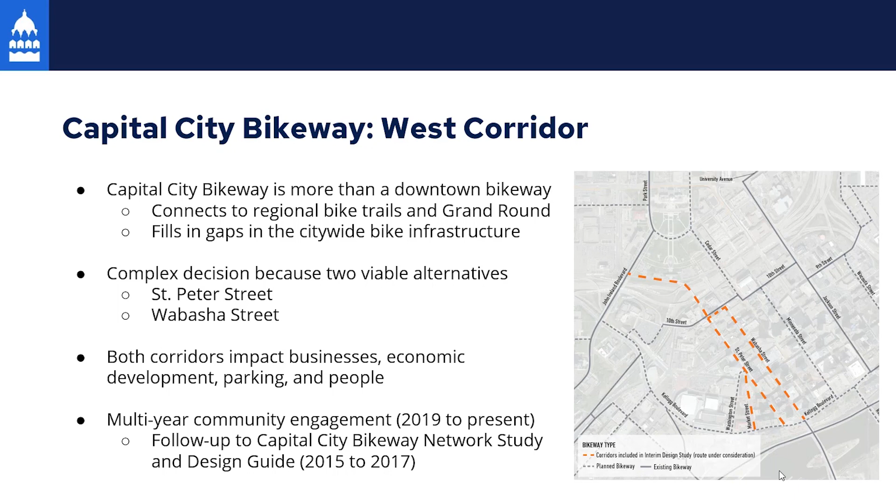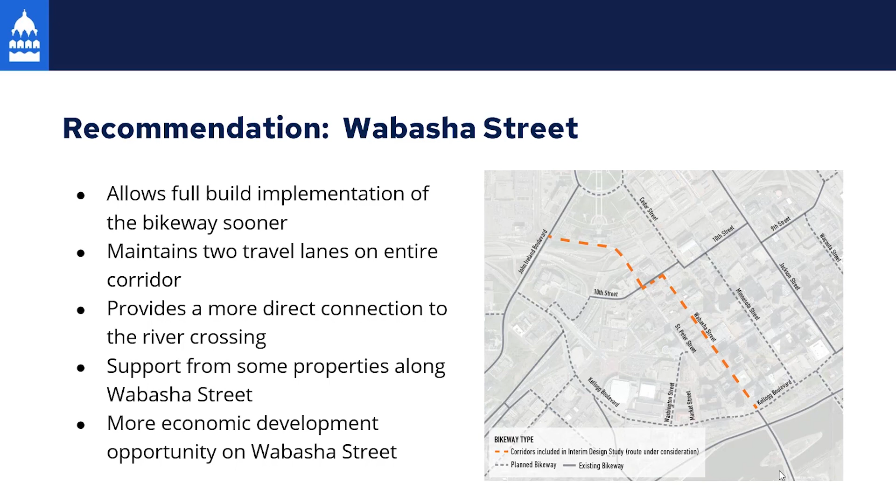This recommendation today is the outcome of a multi-year community engagement process. Before that, there was the Capital City Bikeway Network Study that was done from 2015 to 2017. The recommendation we're making is for Wabasha Street to be the western leg of the Capital City Bikeway. This allows for full build implementation of the bikeway more quickly. It maintains 2 travel lanes on the entire corridor. It provides a more direct connection to the river crossing, and there is support from some properties along Wabasha Street. We also think that there's more economic development opportunities on Wabasha Street.

To walk through the details of this, including the history and the work we did, and more information on the recommendation and the options we looked at, I want to introduce you to Randy Newton, the city's traffic engineer. Thank you, Sean. As Sean shared, I'm Randy Newton. I'm the city's traffic engineer, and I have been charged with leading the city's efforts on the Capital City Bikeway Interim Design Study. With this presentation, we wanted to go through the background and history of the Capital City Bikeway and the process we undertook that led to the recommendation for Wabasha Street.

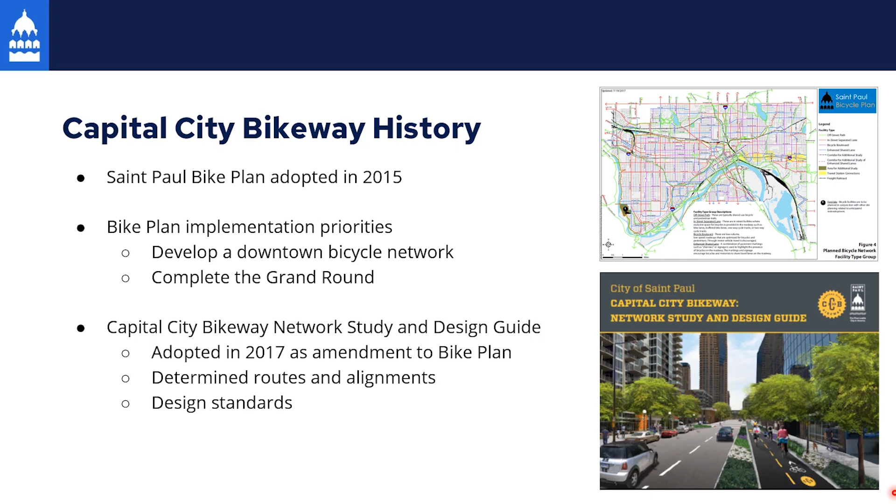A little history on the Capital City Bikeway. The St. Paul Bike Plan was adopted in 2015. 2 of the main priorities of the bike plan were to develop a downtown bike network and to complete the Grand Round. The first step in developing that bikeway network was the completion of the Bikeway Network and Design Guide. That work was adopted in 2017, and the key outcome of that was determining preferred routes and alignment for the Capital City Bikeway and design standards for the full build of the bikeway.

Since the completion of the Bikeway plan, the city has been working on the implementation of the Bikeway network. We started with the Jackson Street corridor on the east side of downtown, which was constructed in multiple phases between 2016 and 2018. The majority of this work was done as part of full street reconstruction. Last fall, we were able to implement the 10th Street corridor, and a remaining portion of that is yet to be constructed this year.

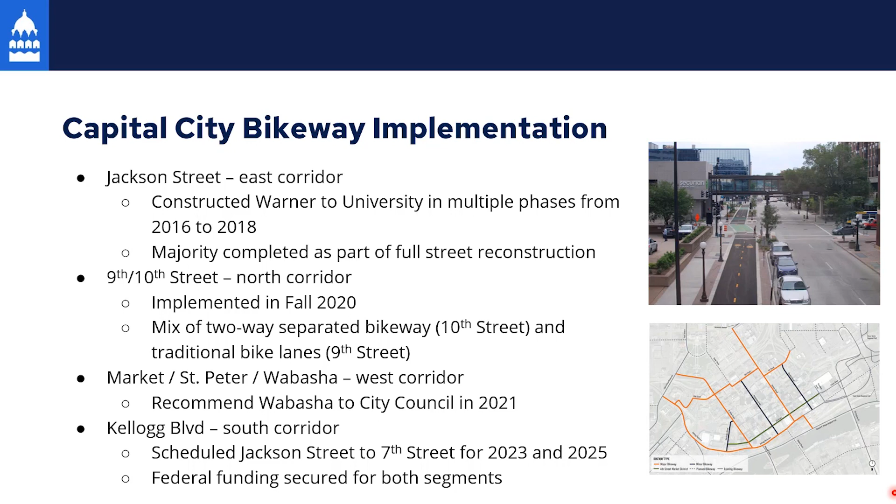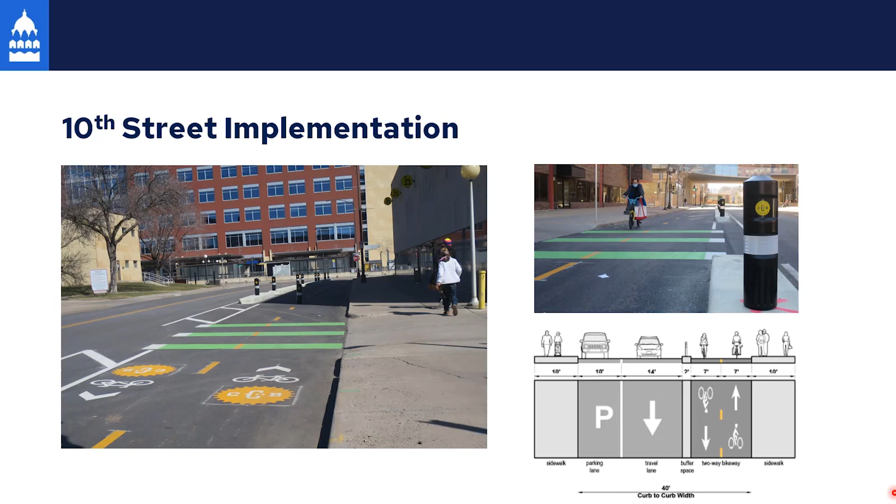A couple key things with the Capital City Bikeway and how it furthers some of the main city goals and policies. Within the Bikeway plan, it identified that a bike network downtown was a priority, and in particular, a network that calls for a safe and well-connected bikeway serving all ages and abilities. This is consistent with a couple of key city goals. First, it's providing safe and reliable transportation choice and removing the need for single occupant vehicle trips. Secondly, it's a step towards our goal to significantly reduce the number of vehicle miles traveled in the city.

2 years ago, we began work on the interim design study process. With this work, there were 3 primary objectives. The first was to determine an interim design for the north corridor, which was 9th and 10th Street. That work has since been completed. The other 2 steps were to determine a preferred route for the west leg of the corridor, either St. Peter or Wabasha Street, and to determine appropriate design for that corridor.

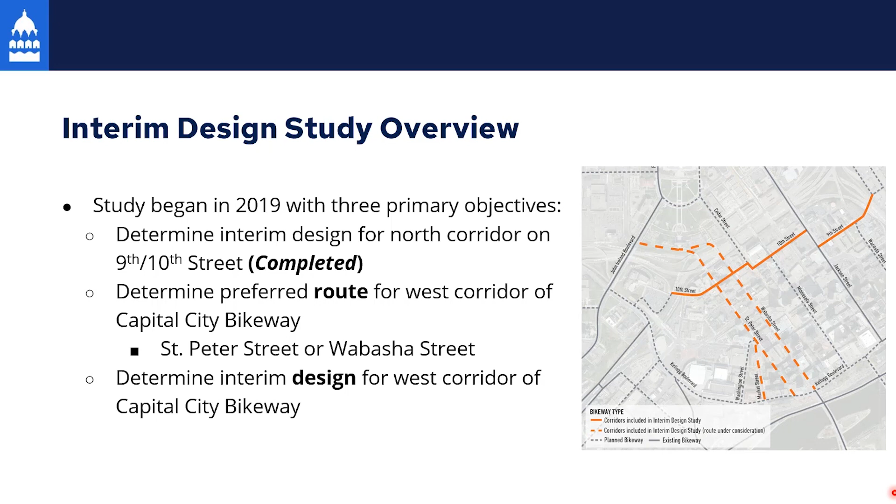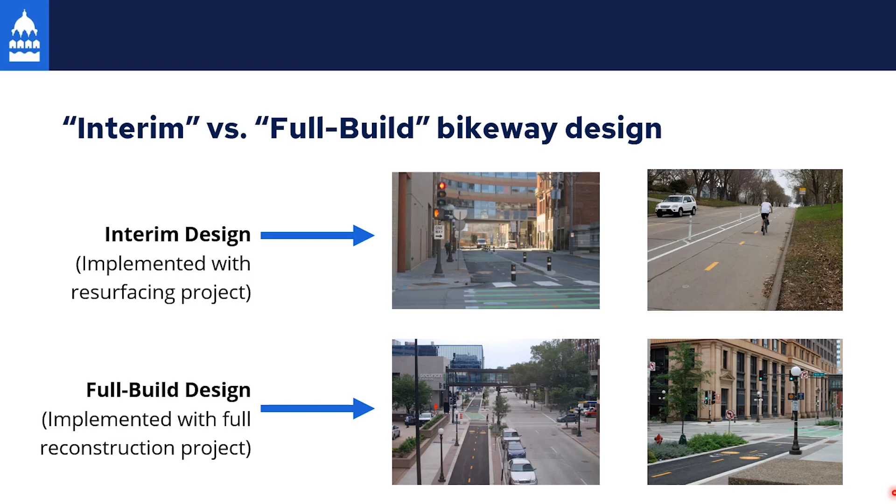We will often be using the difference between interim and full build as we go through this. What we mean by interim is something that can be built within the confines of the existing roadway. The picture in the upper left is a picture from what we implemented on 10th Street last year. On the upper right, it's a picture of Pelham, which was another interim implementation several years ago. The full build design, which are the pictures on the bottom, are Jackson Street and show essentially a bikeway constructed as part of a full street reconstruction.

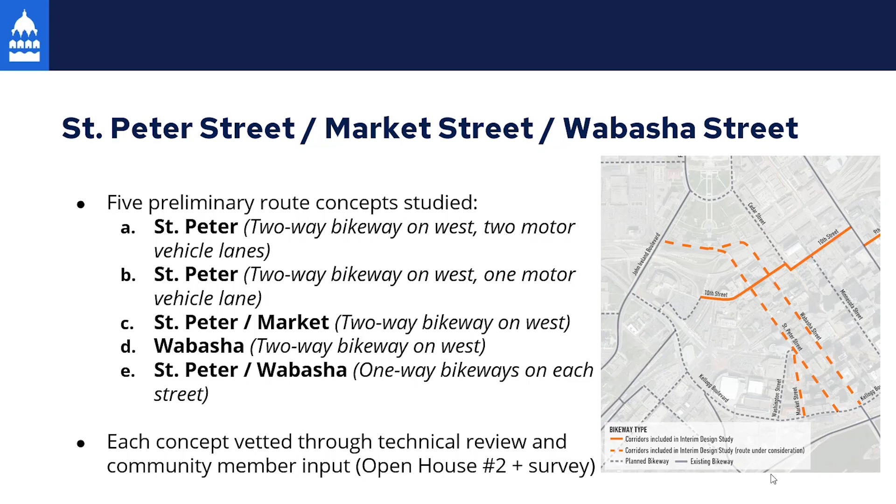Our process for the review of the west leg of the Capital City Bikeway was an iterative one. We started with brainstorming a number of different route concepts, and ultimately pared that down to 5 initial routes that had a preliminary evaluation and ultimately were shared with the public at open house number 2. Through the feedback that we received at open house number 2 and our internal review, we ultimately pared that down to 3 primary corridor concepts that we reviewed in greater study.

One was the St. Peter Market Street corridor, which was a 2-way bikeway along the west side of both streets. The second option was the bikeway along the full length of St. Peter, which maintained primarily 2 motor vehicle lanes along St. Peter, except for a stretch between 4th and 6th Street.

And the third alternative was a revised Wabasha Street alternative that followed Wabasha Street from Kellogg to 10th Street and used the 10th Street bikeway to jog over to St. Peter to complete the crossing across the 94 corridor.

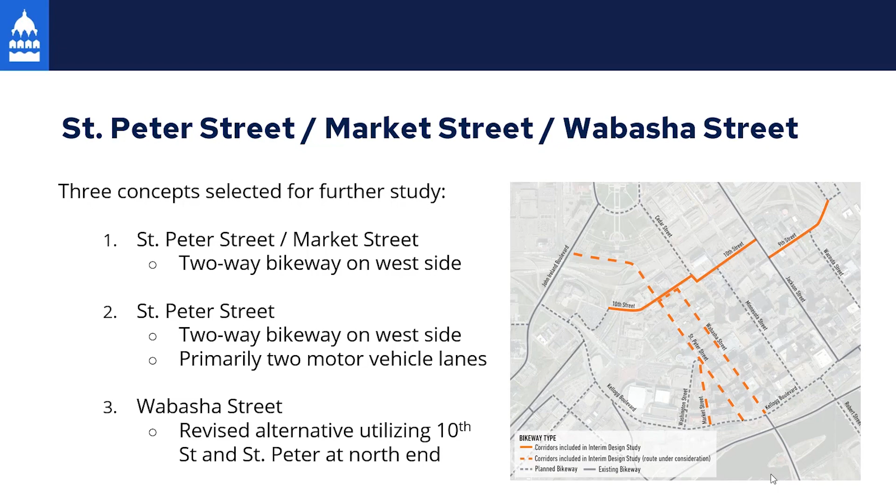Over the last 2 years going through this process, we've undertaken an extensive public engagement effort. This includes maintaining a project webpage, which includes a lot of information that we have shared throughout the project. We have had 3 public open houses with good attendance, and that included follow-up surveys that people could take online to provide additional feedback on the process.

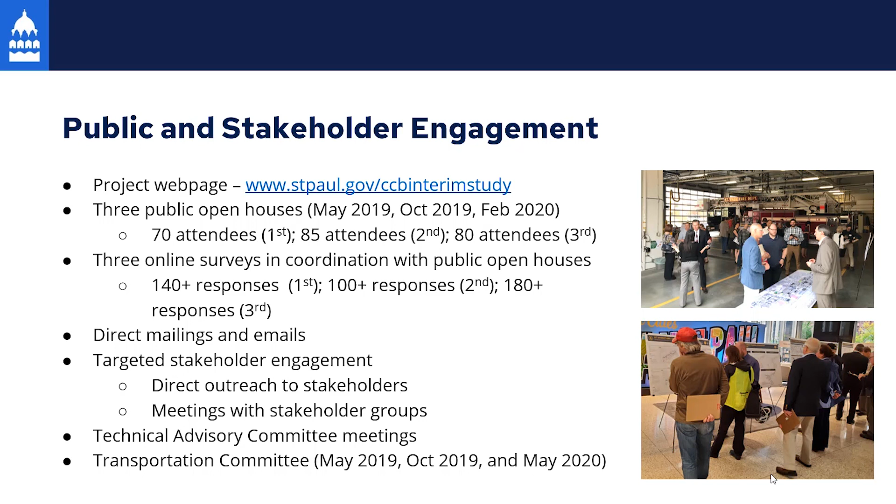We directly reached out and had conversations with a number of different stakeholders throughout the process. We also had an internal group that met several times to work through the technical details of the project, and we have made 3 presentations to the Transportation Committee. Through this process, we've heard a number of things. The following is a brief summary of some of the key highlights.

First, we've heard that there is a preference for bikeways with physical separation from motor vehicle traffic. We've also heard a preference for 2-way bike facilities as opposed to 2 one-way facilities. In terms of use of the right-of-way space, sidewalks and sidewalk amenities were seen as a top priority. The need for loading zones and valet zones was an important concern for business operations. Loss of convenient parking is a concern that we hear on most projects we do, and was certainly another one that we heard on this corridor.

We heard a concern over the traffic impacts of reducing St. Peter to a single lane, in particular the potential to block that single lane due to vehicles and delivery vehicles loading and unloading, as well as valet users. This was a particular concern during the event times that we experience downtown. We also heard that there was support from some of the properties along Wabasha Street for the bikeway. We also heard and acknowledged that bikeway maintenance is very important, especially in the winter months.

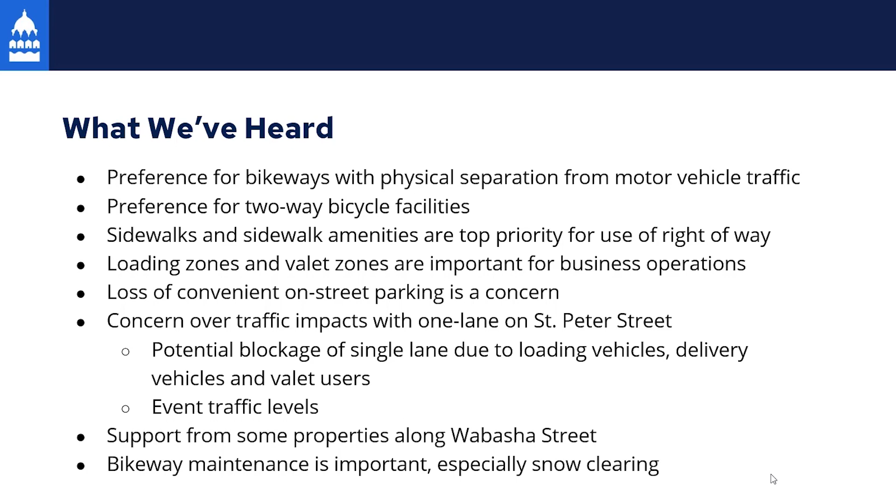As part of our evaluation, we looked at a number of different factors. One of the things that we did was complete an evaluation matrix, which is available online, that shows some of the key differences between the corridors. What is shown here is a brief summary of some of those highlights. One of the key things with the Market Street alternative is that over 40 plus days a year, we'd expect the bicycle network to be interrupted due to special events. Another key difference was that the traffic volumes on Wabasha are 2 to 3 times higher than what you'd experience on St. Peter and Market.

We did identify that Wabasha would have more vehicle and bike conflicts than either St. Peter or Market Street. In regards to bike conflicts, that is the number of interactions between bikes and vehicles that would exist on a corridor. Do note with this one in particular that we do not think the number of vehicle-bike conflicts on Wabasha is particularly high or unusual for a bike network, and certainly is not a reason that we would not select a corridor.

We identified that there is more parking loss on Wabasha than on either the St. Peter or Market Street alternatives, approximately 80 spaces versus 60 on St. Peter or Market. We note that with the St. Peter alternative, there is a direct connection to the north across I-94, and with the Wabasha option, there is a direct connection to the south across the river.

We also did look at the full build in terms of what this would look like if the roadway was fully reconstructed. We did note that with a full build and the potential to go down to a single lane, the St. Peter option offers more flexibility in the reconstruction of the roadway. However, we do note that that does assume that a single lane would be constructed, and that there were a lot of concerns with how that would impact the traffic operations downtown.

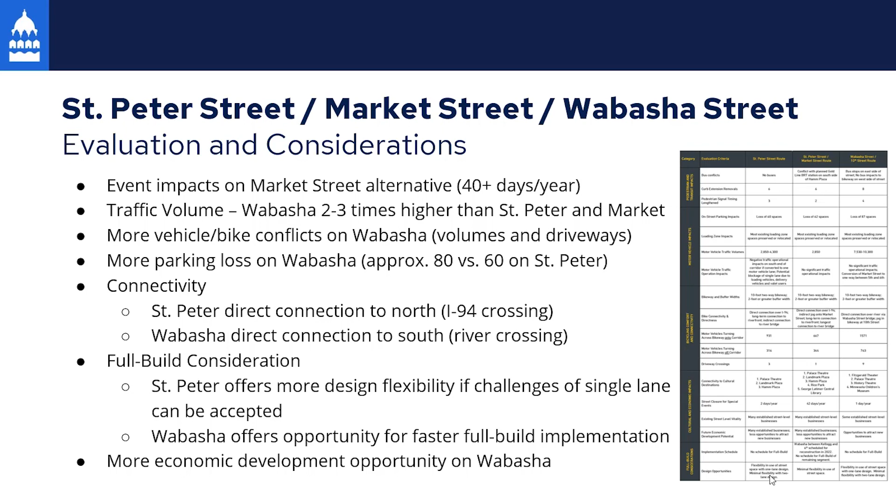Lastly, Wabasha offers more economic development opportunity with the implementation of the Bikeway. With these next slides, I'm going to walk through each of the alignments in a little bit more detail to provide more information on each alignment.

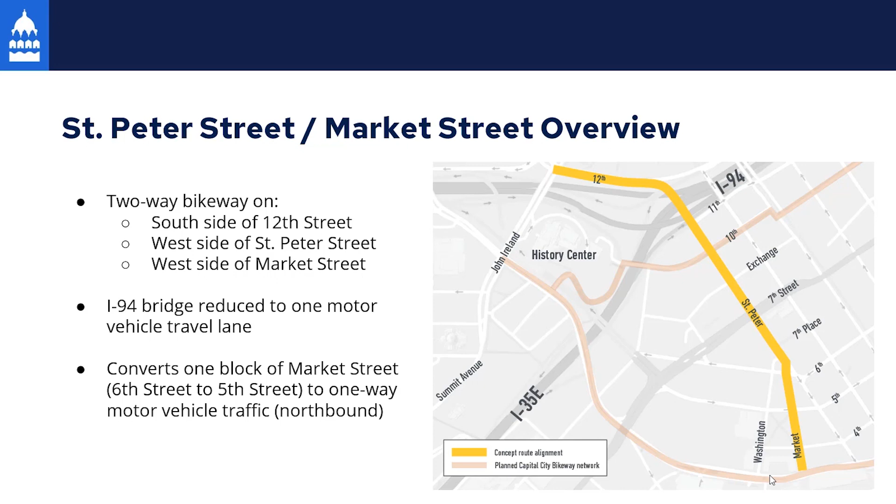First up is the St. Peter and Market option. This option is a two-way bikeway along the south side of 12th Street, along the west side of St. Peter and the west side of Market. Across the I-94 bridge at 12th Street and St. Peter would be reduced to a single lane. It also would result in the conversion of one block of Market Street to a one-way motor vehicle traffic.

A couple of the features of the St. Peter Market alternative include that it retains the curbside space along the east side of St. Peter. It does result in a challenging connection between St. Peter and Market. We also note that the use of the Market Street convertible space is not compatible with the events that commonly are staged there.

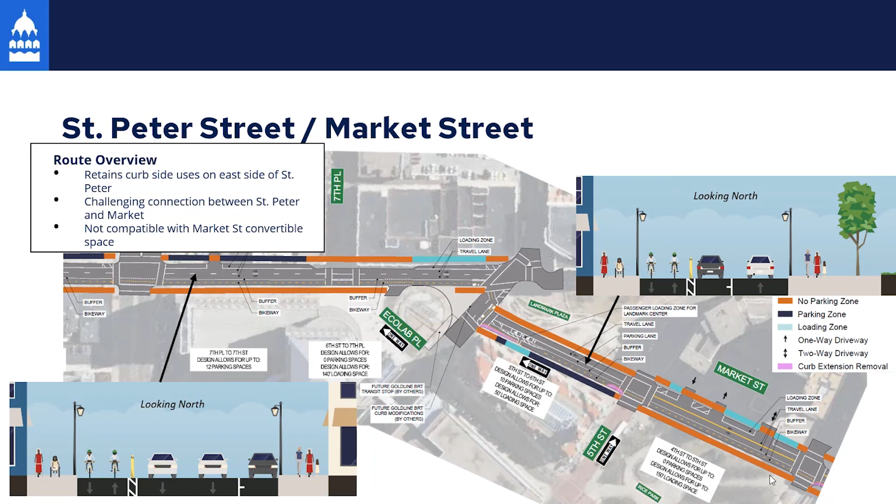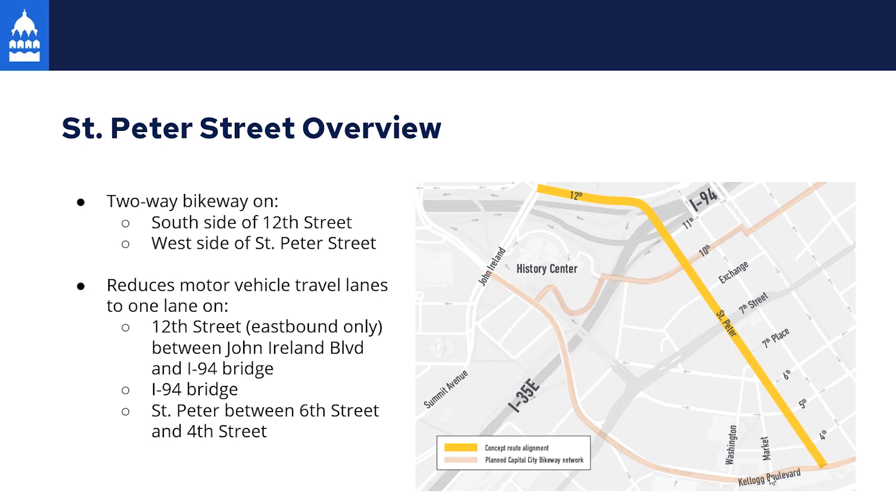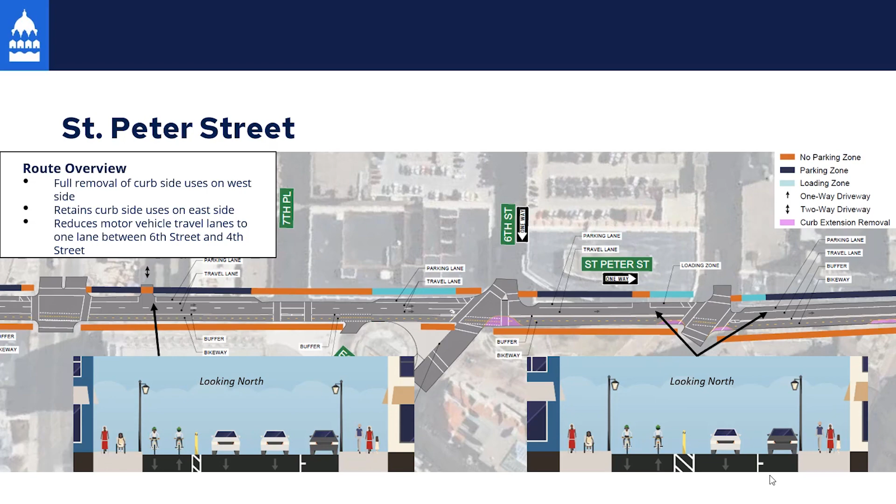Moving on to the St. Peter Street alternative, this concept includes a two-way bikeway along the south side of 12th Street and along the west side of St. Peter. This reduces various sections of the corridor to a single lane. This includes 12th Street on the north side of 94, the crossing of I-94, and St. Peter between 6th Street and 4th Street. This concept includes the full removal of curb uses along the west side of the roadway, but retains all the curbside uses on the east side. As noted before, it reduces motor vehicle traffic to a single lane between 6th Street and 4th Street.

This slide shows the pros and cons for St. Peter Street, which we ultimately deemed to be a viable alternative, but one we did not recommend. On the pro sides, this option maintains parking and loading zones along the entire east side of the corridor. It maintains two motor vehicle lanes along the majority of the corridor. There are less vehicle and bike conflicts than Wabasha, and it provides a direct connection to the north across I-94. In a full build option, there is more flexibility for the St. Peter option. However, this assumes that we would reduce the entire corridor to a single lane, which we also have concerns with.

On the con side, the reduction to a single lane creates concerns with valet traffic, deliveries, and event traffic blocking up that single lane and creating congestion in an important part of downtown. There are also impacts to the Palace Theater loading operations as we remove parking along the west side of the roadway. There are some design constraints that we'd expect to have to deal with with regards to state aid and emergency vehicle access. These are things we expect to be able to work through, but they may affect how we would do the design. There's also the loss of on-street parking and the removal of bump outs that would occur with this option.

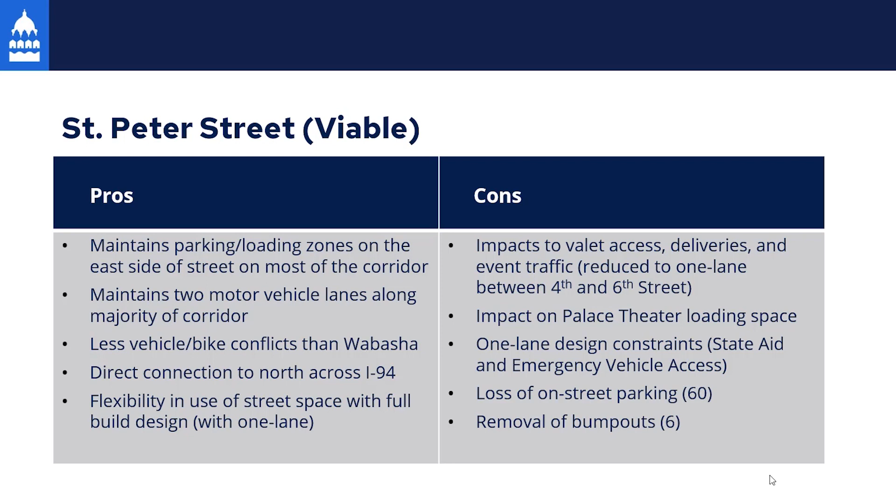Moving on to Wabasha Street. This option includes a two-way bikeway along the south side of 12th Street, the west side of St. Peter north of 10th Street, the south side of 10th Street, and the west side of Wabasha. Along 12th Street and across I-94, traffic would be reduced to a single lane of traffic. The bikeway would then jog along the 10th Street corridor to utilize Wabasha Street. The bikeway is recommended along the west side of Wabasha due to the bus stops that currently exist on the east side. Also note that Wabasha Street is tentatively scheduled for reconstruction in 2022.

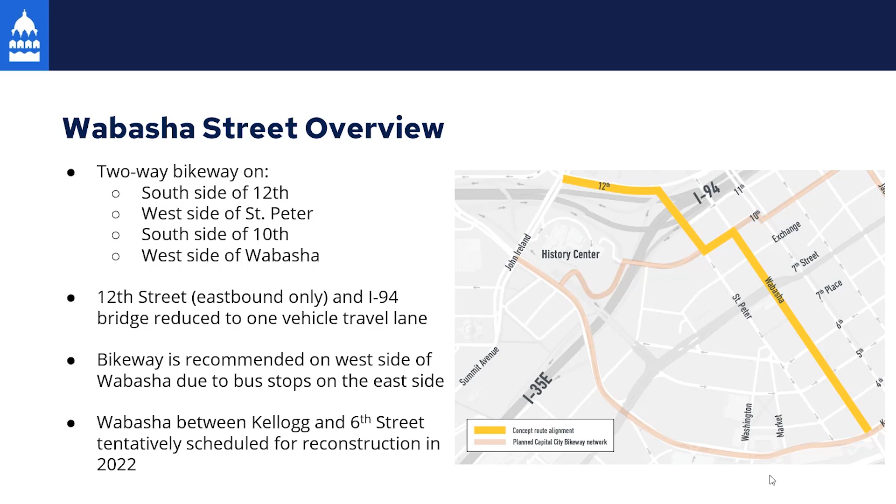A couple of key features of the Wabasha Street alternative include that there would be full removal of the curbside uses along the west side of the street, and as with St. Peter, all the curbside uses along the east side can be retained. It does maintain 2 lanes of traffic along the entire corridor, and as noted previously, a full build project is scheduled on Wabasha between Kellogg and 6th Street in 2022.

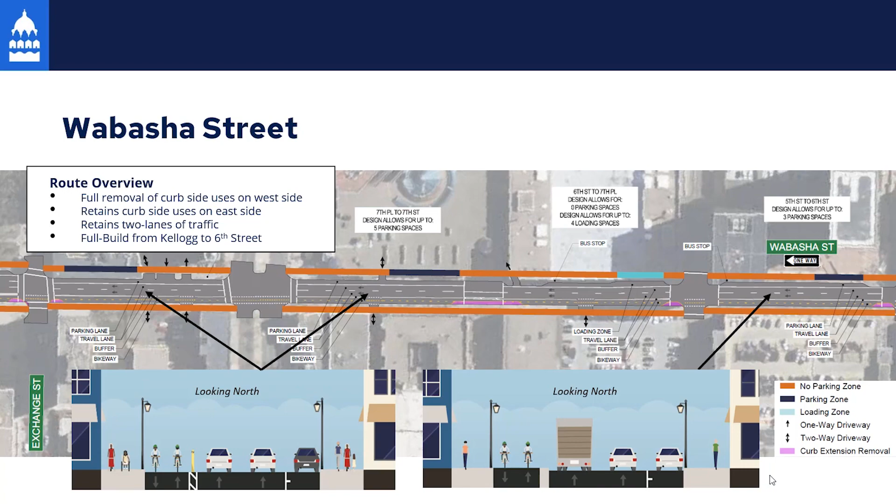This slide shows the pros and cons for the Wabasha Street alternative, which we ultimately are recommending. The pros of this include that it allows for earlier implementation of the full build bikeway along the southern segment of the corridor. It provides a direct connection to the south across the river. It maintains the parking and loading zones along the east side of the roadway. It's the alternative with the least number of overall traffic impacts. It has some support from the properties along Wabasha, and the implementation of the Bikeway would create more economic development opportunities.

On the con side, we note that this does impact the parking spaces that the Amsterdam uses for their loading space for their events, and we will work with them to find a best solution for working through their loading needs. It also does impact the location the Children's Museum uses for loading, and the loss of that space will occasionally require a blockage of one of the through lanes on Wabasha.

This option does have the most vehicle and bike conflicts, as previously shared. As noted, this is not a major concern, and we still believe this is a viable option. We do note that the key location where this shows itself is the left turn conflicts from Wabasha northbound to westbound on 6th Street. We also note the loss of vehicle parking on Wabasha, which is significant and directly affects a number of businesses. It also results in the removal of 8 bump outs.

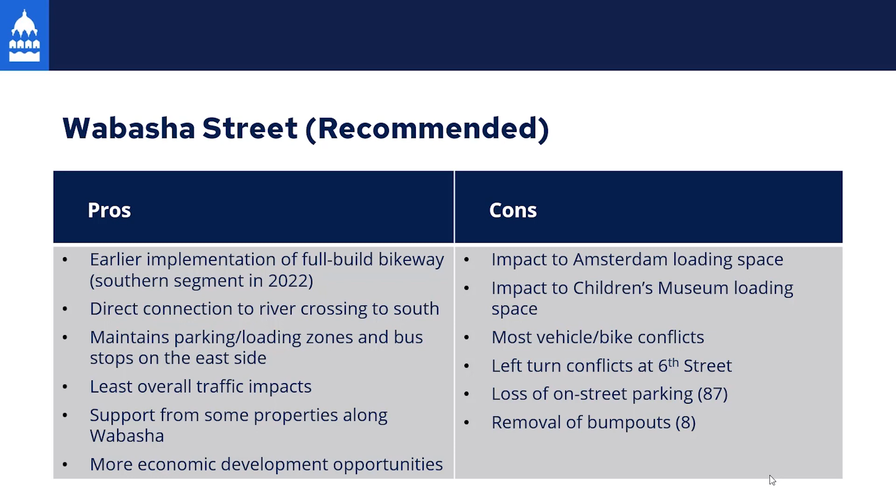As Sean previously shared, this work ultimately led us to a recommendation of Wabasha Street for the west leg of the Capital City Bikeway. This was a challenging decision because we ultimately were able to determine 2 viable alternatives, with both alternatives having real impacts along each corridor. Ultimately, we recommend Wabasha Street because it allows for a full build of the Bikeway sooner. It maintains 2 travel lanes along the entire corridor. It provides a more direct connection to the river crossing to the south. It has support from some properties along Wabasha Street, and there's more economic development opportunity with the Wabasha Street alternative.

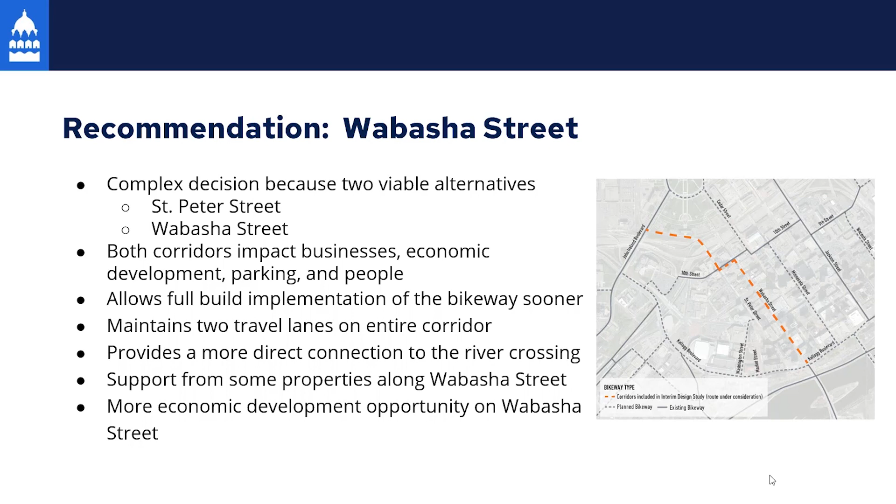With the next few slides, I'll share a little bit more detail about the Wabasha Street alternative. I'll also share that concept layouts for each of the alternatives are available online. This is the northern section of the Wabasha Street corridor and shows the portion of the 1-lane segment of 12th Street north of I-94 as well as the I-94 crossing. It utilizes 1 block of St. Peter Street between 11th and 10th Street before jogging along the existing 10th Street Bikeway.

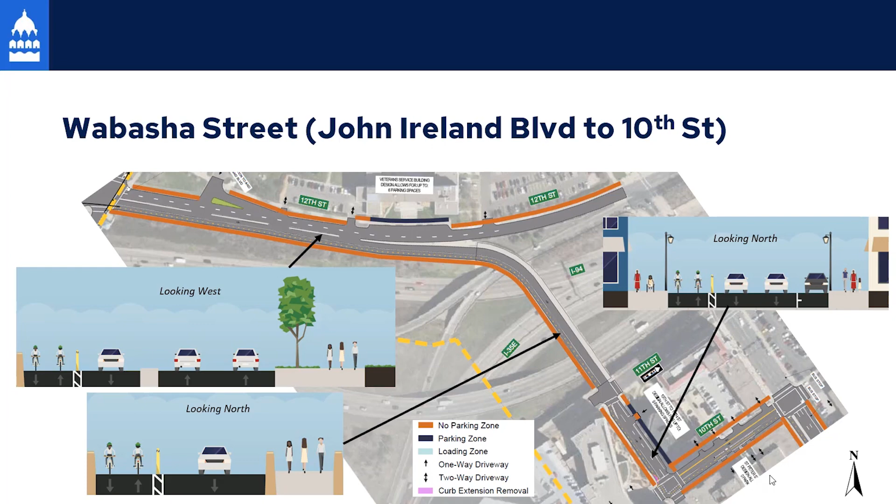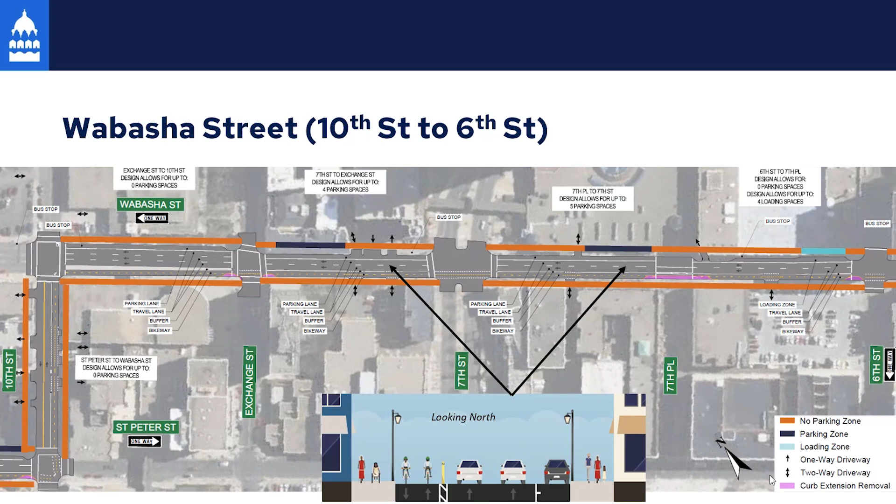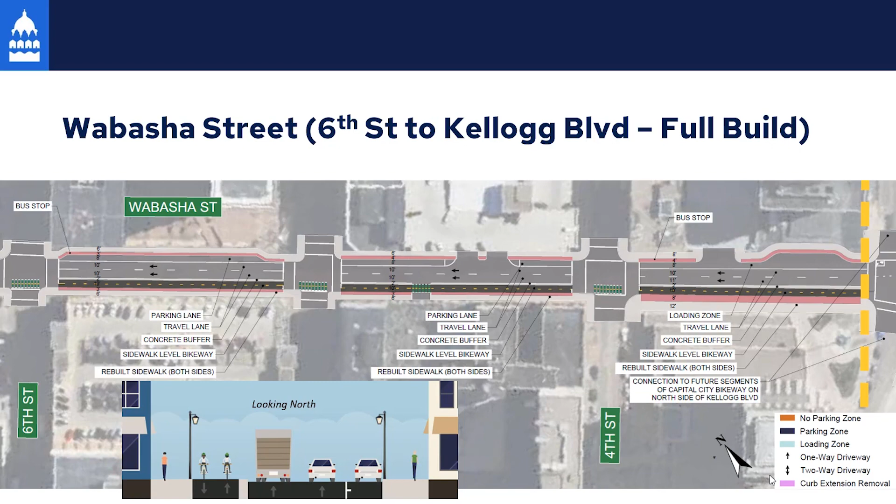This is the northern piece of the Wabasha Street alignment between 6th Street and 10th Street. At this point, it's intended that this would be constructed as an interim bikeway, and we're still working on the schedule for the implementation of that segment. The following piece is the southern segment between Kellogg and 6th Street. And as previously shared, we would intend to build this as part of the full build reconstruction of Wabasha, which is currently scheduled for 2022.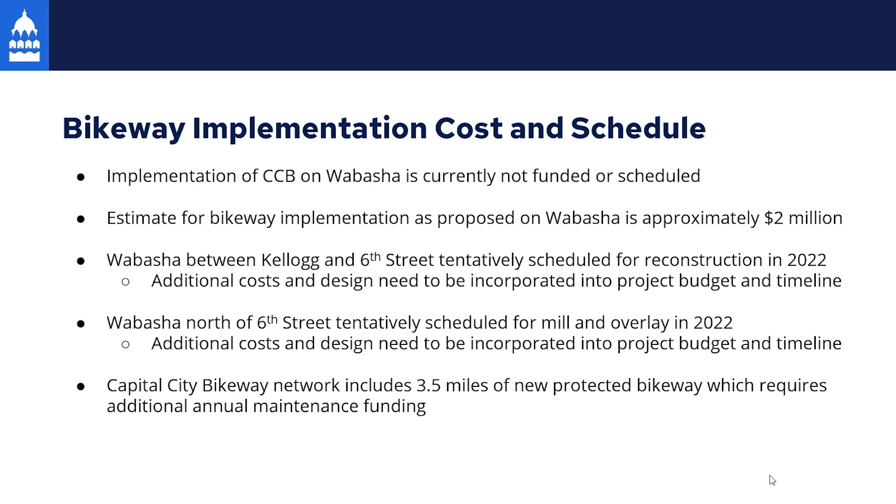As for project next steps, we are accepting comments on this recommendation until April 25th, 2021. The comment form to provide comments is linked to the project webpage. We've also tentatively scheduled a City Council public hearing for May 12th, 2021. Comments for the public hearing must be submitted in writing or by voicemail by noon the day before the public hearing, and we will be providing additional information for the announcement of the public hearing later in April. The City Council public hearing will be able to be viewed online. And lastly, as I previously indicated, one of the key next steps for us is to determine the project funding and implementation for the Capital City Bikeway.